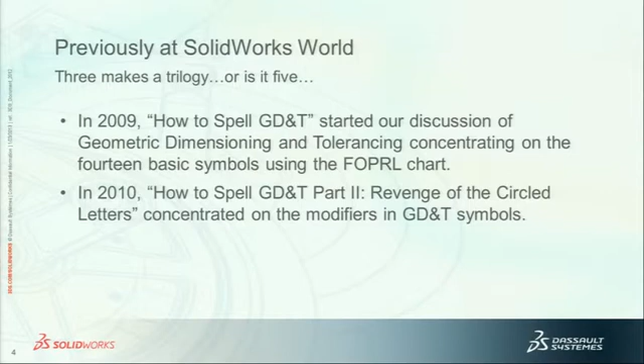There wasn't an obvious 3rd one to go after, so I went a little different tack this time. We're actually going to talk about tolerance zones and shapes. The big push today is what are we controlling when we put GD&T on drawings and stuff.

Leaving the theme of Star Wars, now we're in the Hitchhiker's Guide galaxy. As soon as you read the book, it says the reason why people buy the Hitchhiker's Guide is because it was a little cheaper than the Encyclopedia Galactica, and it had a big button on the front that says 'Don't panic.' But from my remembrance of the book, when you pushed it, nothing happened. So that's kind of what we're doing here. When you do GD&T, please don't panic, and regardless of what button you push, it's probably not going to help or hurt you.

42 in the books, that's the answer to life, the universe, and everything. When you look at GD&T, there are 14 symbols of GD&T. They're broken up into 5 families: form, orientation, profile, runout, and location. We grouped them that way, and that's from that first class I was telling you about many years ago, the FOPRL chart.

There are 14 symbols. They each have a name, a symbol, and a control they produce. 14 times 3 is 42. A coincidence that that's the answer to everything? I think not.

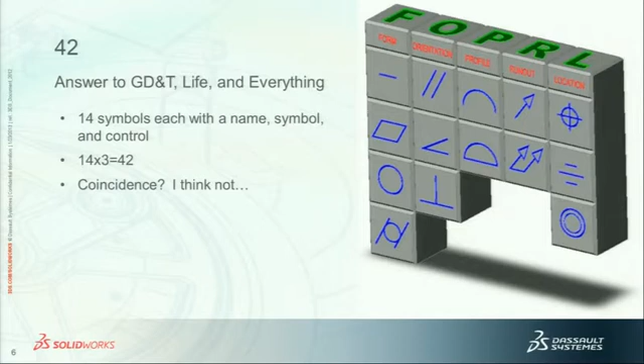Seriously, it's a better way of organizing the GD&T that I came up with to train people who didn't want to learn about GD&T. It makes you kind of feel good.

In 2009, they updated the GD&T standard, and when they did, they started revising how they group the symbols. They're not quite to FOPRL, but really close. They're starting to split up a little differently because it was extremely hard to read the standard and understand what they control and how it controls things.

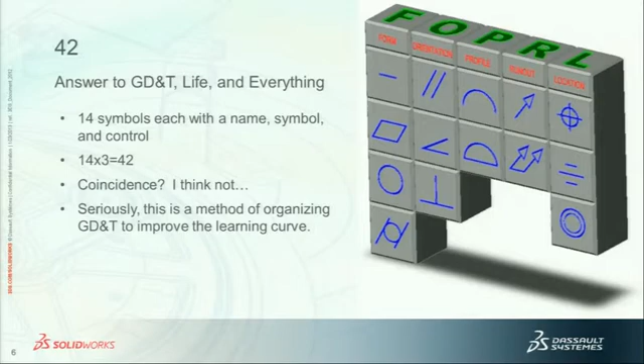Which brings us to the full-up FOPRL chart. This is what it looked like in 1994. We're using the standard, the green standard a lot of people have on their desk. Your drawings would have something that says, interpret this drawing according to ASME Y14.5M 1994. They reaffirmed that in 1999 and 2004.

It takes them a long time to actually change the standard, and you can tell—I think the date at the bottom right-hand corner says 1989, or sorry, 98, is when they actually came up with that chart. It's been a long time ago.

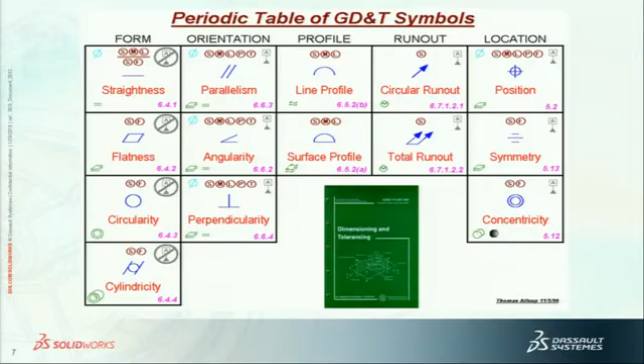But around 2009, they updated the standard for the first time in many, many years, and they switched from a green front cover of the book to now a white cover.

The FOPRL chart changed a tiny little bit, not its organization, but I actually brought it into SolidWorks and made a nice chart out of it. You can download this and look at it later.

It groups the symbols into 5 categories: form, orientation, profile, runout, and location. It groups them up and tells what kind of controls you can have, what kind of modifiers.

Now, if you're going to use this standard on your drawings, your drawings will say something like, interpret this drawing using ASME Y14.5, no M, dash 2009.

Not very many people have adopted this. Most people are still using the 94 standard. You could still buy, until last year, the 1982 standard from ASME.

You have to use whatever standard is called out on the face of the drawing. I have a collection of standards that go back to the 50s, just as ANSI and ASME was taking over who was doing the writing and interpretation of the standard.

If you switch to it on a lark and start putting this on your drawings, then from now on those drawings have to be interpreted using this book, not the old green book.

Most everybody in this room uses the old green book, right? You know what I'm talking about when I say the old green book? It's 1994. I see some heads and stuff.

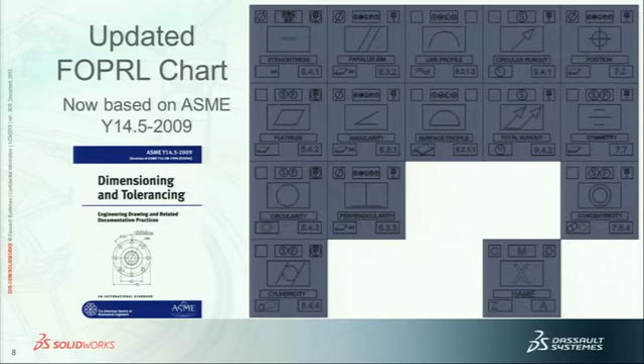The first lesson, after you get over the symbols—which you've already gone back and looked at that archive, and you already know how to put stuff onto drawings—the first lesson you get in geometric dimensioning and tolerances is the very first lesson.

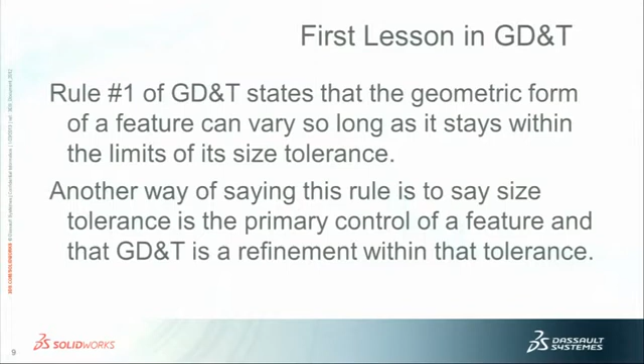The rule as it states in the standard is the geometric form of the feature can vary as long as it stays within the limits of size of the tolerance. That's a lot of big words for saying that the size you put on the drawings is the primary control for what parts you're going to allow to come in. When you add GD&T to those parts and dimensions, you are refining what you're going to accept. But the first thing that controls the part is always the dimensions you put on the drawing.

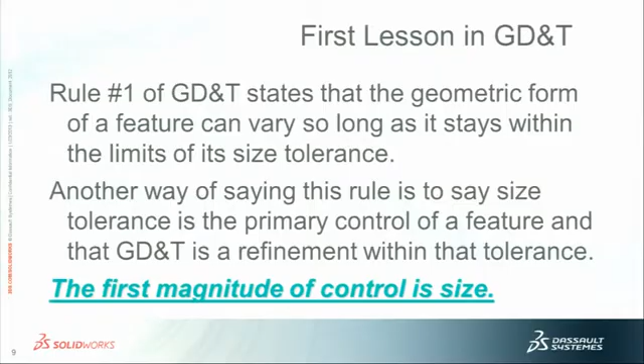A very shorthand way of saying it is, the first magnitude is size. That's the first thing you check.

It seems to bother people that GD&T is only something you slap on top of something after you already dimension it.

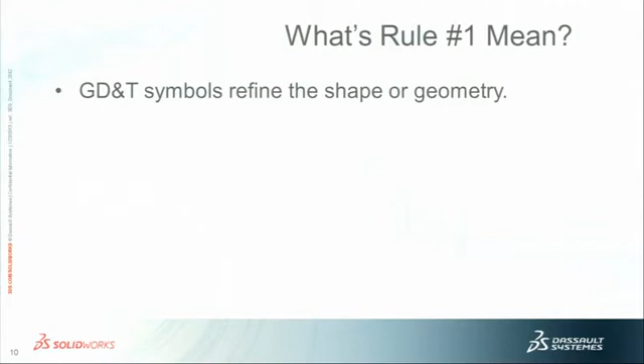Refinement, by refining a particular drawing or refining a feature, what you're basically trying to tell it is that you're going to check all the linear dimensions, all the angular dimensions first. You're going to check all of those size dimensions first before you ever check the GD&T. If your part's not 1 foot long and you ask for a 1 foot part long, does it matter if it's flat or not? You're going to reject it on the fact that it's not 1 foot and I ask for it to be 1 foot long. So GD&T is something you check later.

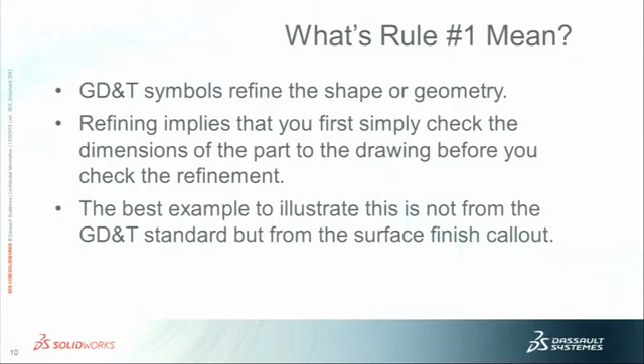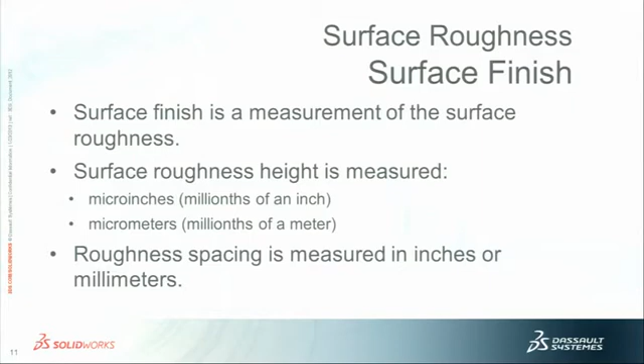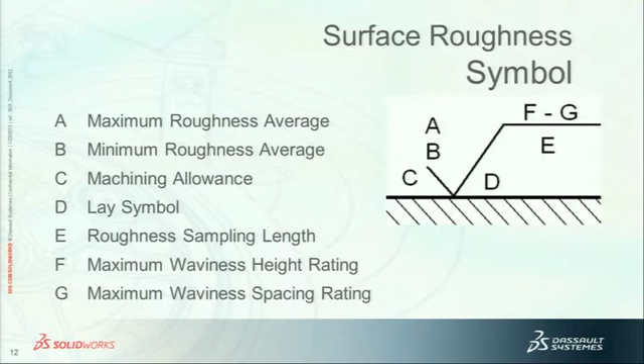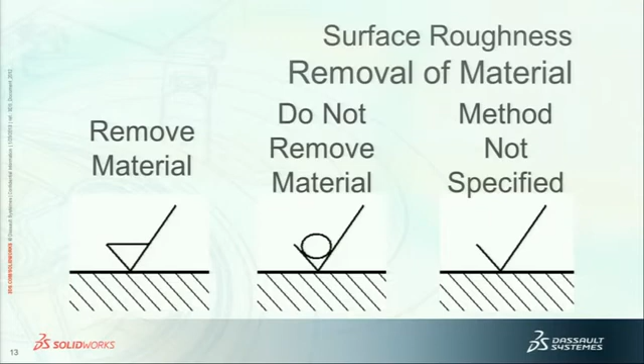The best example I can come up with is thinking about surface finish. Everybody here sees surface finish on a particular piece of material. It'll either be done in micro inches or micrometers. It's a measurement of how rough the surface is. We control that with a symbol. You can put these different numbers around the symbol, and as you put the numbers around it, you're telling them how wavy it can be, how high it can be, how rough it can be between the different edges. You're telling them, if you put different other symbols on there, whether you can remove the material, or if you don't want to remove the material. I don't care as long as it's got the particular surface finish I want. All of this stuff is refining that surface.

I like this slide because the very first surface finish symbol uses the perpendicular symbol, which is exactly the same perpendicular symbol we use in GD&T. The second one is parallelism, and it's not the same symbol we use in GD&T. In GD&T, we use two horizontal lines at 45 degrees to imply parallelism. Does anybody know why we don't use two lines going straight across for that icon? Because it looks like an equal sign, and that's terrible. You want an icon not to imply other things. So I'm not complaining about the surface finish guys, but they really should have used a better icon for parallelism.

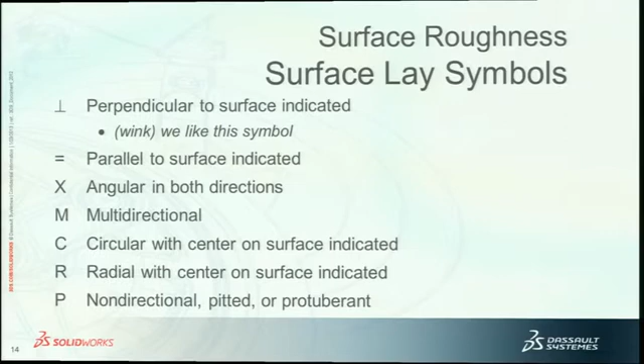When you look at that, you don't start inspecting a plate for surface finish by checking the surface finish. The first thing you do when bringing a plate in is check the length, width, thickness, everything on the drawing that defines what the part is. If any of those dimensions are out, you reject the part. You never waste time checking to see if it's smooth or not. That last inspection process of a part is checking the finish.

That surface roughness is a refinement on the limits of size. And that's exactly our definition of GD&T: you have the limits of size that control the part, and then you do something to refine what geometry you're going to accept. Here it's surface finish. In GD&T, it's geometric shapes.

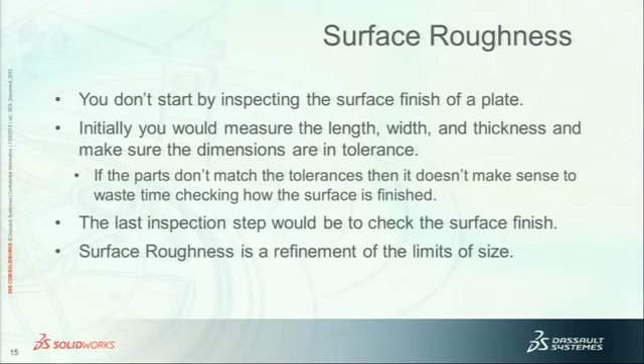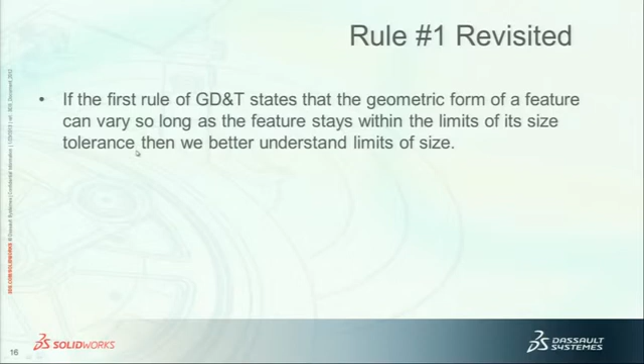If I go back and read that rule one more time, it says I can have a feature and it can move and change its shape and do everything as long as it falls within the limits of size of the size tolerance. Limits of size—I've said that word like 10 times now, and I really haven't defined it. Limits of size are the absolute minimum and absolute maximum value any particular dimension can have.

We are used to seeing dimensions that say 0.25 plus or minus 0.05. You actually have to do the math in your head and find out what the lowest acceptable number is and the highest acceptable number, and that's the limits of size. Those dimensions are allowed to be in that range, and it's acceptable.

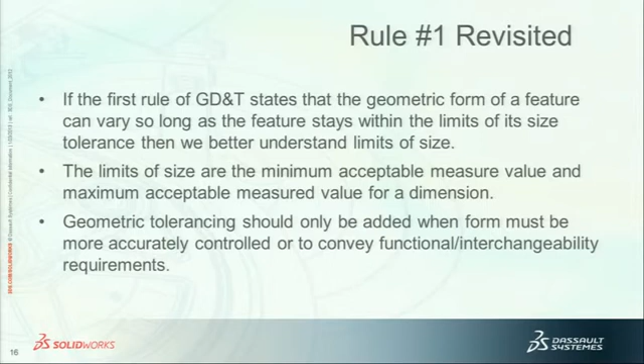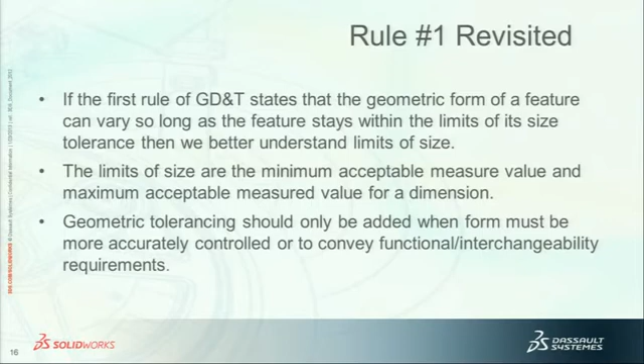When you look at GD&T, if I'm going to refine that size, what I'm controlling has to be smaller than those tolerances. If my tolerance is 0.05, then my GD&T has to control something better than 0.05, because I'm already getting that control from just my limits of size. That's a big mouthful for limits of size.

If I look at this particular part, here's one that's not dimensioned the way we'd probably like to see it, but it does what I want it to do. It has a lot of different features. We have a call out of a hole with a counterbore that has a particular depth. We have a radius. We have an angular. We have a reference dimension.

What is the limits of size for a reference dimension? There is no limits of size because it is a reference. You would never use that as an inspector. You're not expecting the machinist to use that dimension either, but you're only giving that to us for information purposes. But all the rest of them have tolerances to them of some sort.

So if I look at this particular call out here for a square hole that goes through the part, it has a square hole, 0.625. It's plus 50 minus nothing. Well, then the absolute smallest that would be acceptable is 0.625. The largest that would be is 0.675.

I'm not going to go through every one of these numbers, but you can kind of see we're trying to find out what the lowest one is and what the biggest one is. These are the limits of size for each one of these features.

Let me get to one of these. Here's a good one: the 0.75 radius max. What is the minimum radius allowable in there? Zero, max. It goes all the way up to 0.75. It can't be any more than that.

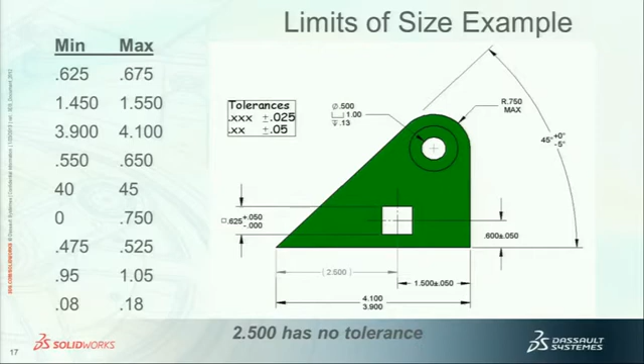The rest of these kind of all make sense. And of course, the 2.50 across the bottom has no tolerance. It's just a reference. So any feature that comes in and falls within those ranges of those numbers, that's the limits of size for this particular part, for each particular feature inside this part.

I have to take a little aside here and ask a question of the group. Is there a difference in the connotation of what it means to people if you see, on a drawing, 0.100-150, which everybody here agrees means that feature is 0.100 to 150 acceptable, versus 0.125 plus or minus 25? Is there any difference?

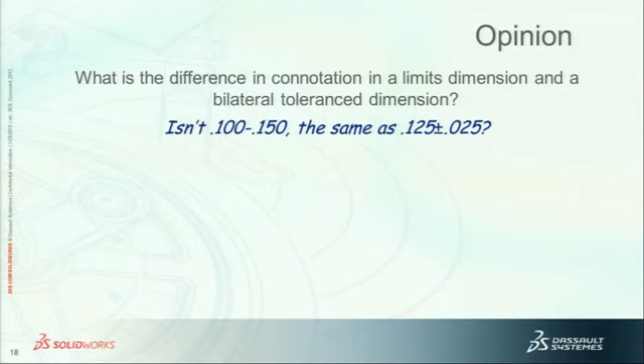I got yeses and nos, which is good. Answer number one is they're identical. They give the same limits of size. As far as GD&T standpoint, they're identical. They have the same range. But somebody said the word connoting. What's the connotation of it?

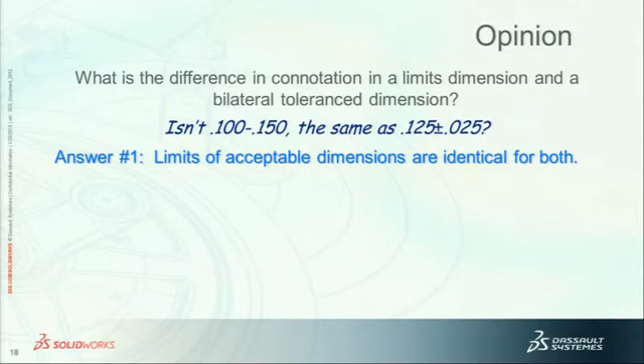Answer number two is, if I was a manufacturing guy doing this, what would I target? I would target 125 if I'm the right-hand side and let it go both ways because I want my maximum yield, if it's a standard kind of process.

But what if it's drilling a hole and all that's going to happen is my drill bit's going to wear out and my hole's going to get smaller and smaller? What would I target then? I would target the biggest hole. I would start drilling at 150 knowing that as my tool bit wears out, I'm going to get closer and closer to 100. So the first parts you get are at 150, and over the life of the program they get all the way down to 100. And then he's going to buy a new drill bit, because you're really cheap and you buy cheap equipment. So it's two different ranges of what you're trying to target for.

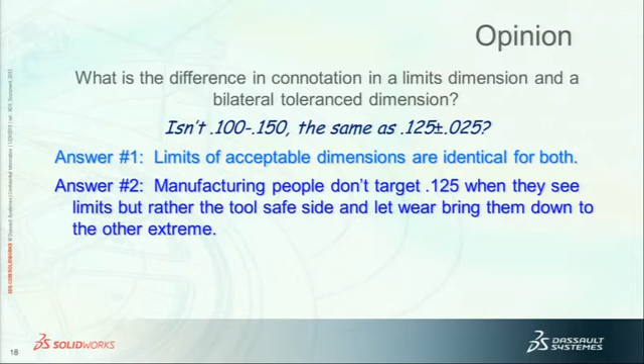Answer number three is, what would you put on the CAD model? If you see 150 to 100, did you model at 100 knowing it was getting bigger? Did you model at 150 knowing it was going to get smaller? Did you model at 125? So there's a connotation difference between who the modeler is and what you're trying to tell the person.

My answer to this from a GD&T standpoint is I want to see the one on the right-hand side. I want to see what your target is. My target was I was trying to get an eighth of an inch hole, so I gave him my target, 125, and oh by the way, I don't care if you miss it bigger or smaller. The one on the left, 100 to 150, I've given him no design intent whatsoever. All I've told him is what's acceptable. Although it's not a rule of GD&T, that's what we're trying to do with geometric dimensioning and tolerancing, is impart as much design information as we possibly can into the model, into the parts, into the drawing. So I would always put what's on the right, not what's on the left.

Are they both acceptable? Yes.

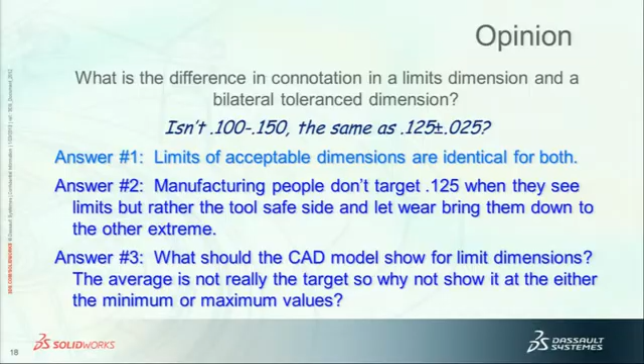Another little aside here. In the 1994 standard, there's one callout in there, and at the time it was a controversial paragraph to be added. The paragraph reads, if CAD/CAM database models are used and they do not include tolerances, then tolerances must be expressed outside the database to reflect design requirements. That means if you had 3D CAD models, you had to give somebody a drawing.

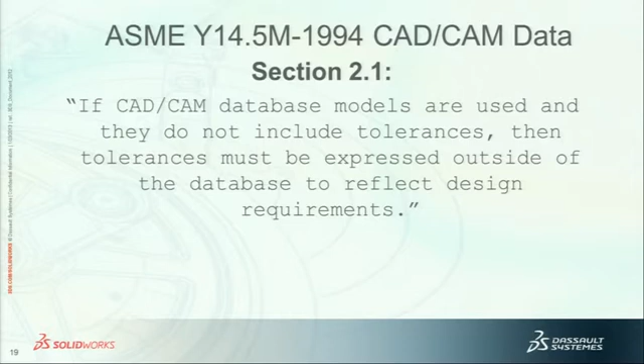What it was trying to say, it said with a negative, was oh, by the way, if you can put those tolerances inside your 3D CAD model, you don't have to make a drawing. And that's why it was controversial in '94 — you mean we can make parts without drawings, as long as everything's embedded inside the model? And like I said, it says it with a negative, and it's the only paragraph in a book this thick that mentions the fact that we might be doing stuff in the 3D world. Flash forward to 2009.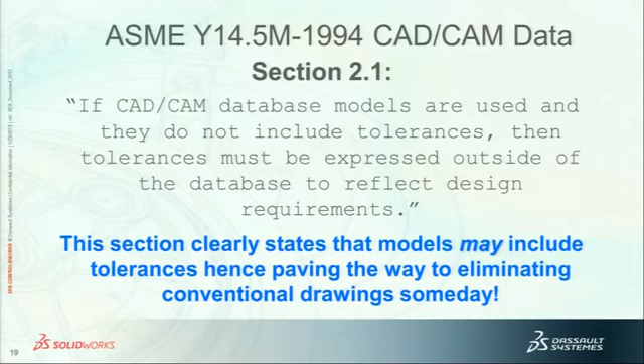2009 states, under its documents of what you can use, it cites the Y14.41-2003 standard that says here's how you do 3D product definition in the 3D world. It gives all the rules for what you do to embed dimensions and tolerances inside a 3D model, which means I can have a drawing or I don't need a drawing — all my data is inside my 3D model. It provides guidance for what you're supposed to do, and companies like SolidWorks and others follow that when they produce their files. If you use any of the standard formats — Parasolid, STEP 203, STEP 214 — they don't do it in IGES, but if you use any of the standard 3D models, they include the data per this standard.

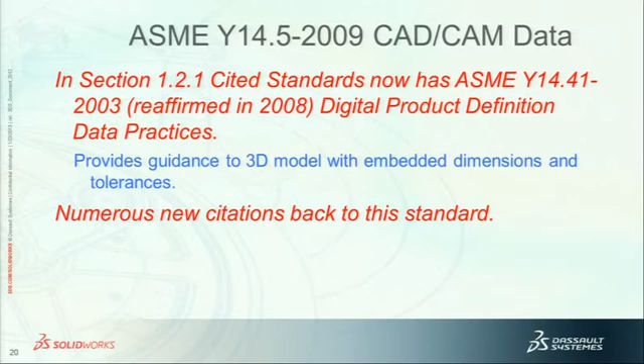There are numerous citations. This standard is about the same thickness, and now throughout the entire book they realized by the year 2009 that we're all using 3D computers, so they better mention here's how you do it if it's going to be embedded inside your 3D data.

It got mentioned by one of them. I was given this class before, and they said, oh no, it's real well documented in 1994 because of this. And I was like, in 1994 there was only a handful of 3D CAD systems, and that's when they wrote the standard. They kept reaffirming it, and like I said, that one paragraph was kind of even a controversial paragraph when they added it.

Let's get back to what we were talking about, limits of size and stuff. If you saw a part like this drawing, you'd see its overall length is 5 plus or minus half, its overall height is 3.5 plus or minus a half. If you look at that particular model, I've drawn some hidden lines inside and outside. That inside is the smallest the part could be. The outer one is the biggest the part can be.

They have very special names in the GD&T world for that. We call the one on the inside the least material condition. It's how does the part weigh the least? So it's the smallest that plate can be. I drew the lines on the outside for how do we make that part weigh the most? Well, if it's at the very biggest size, then it's the maximum material condition.

I like thinking of it as a weight, because if I drill a hole in there, what makes a drilled hole maximum material? Well, how do I make it weigh the most? I drill the smallest hole, so I'm trying to make it weigh the most. So maximum material for a hole, for negative features, makes them small. For positive features, it makes them big.

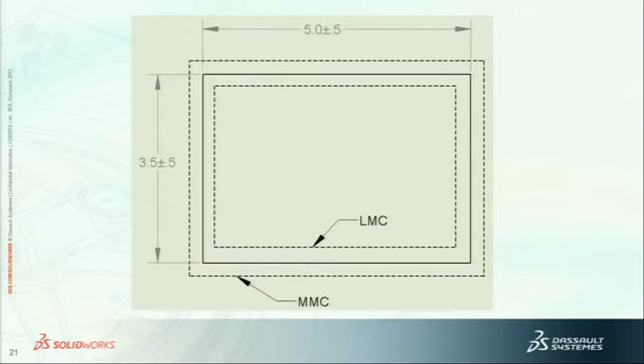It used to have a different name. In World War II, when the GD&T standard was just starting, 45 to 49, it had a different name - they didn't call it maximum material condition, they called it the worst case scenario. Sometime around the 60s, they decided that sounded too militaristic and too bad, worst case scenario, and they changed it to maximum material.

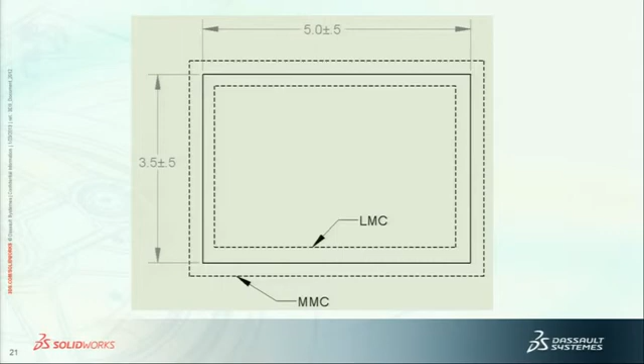So we do maximum material because we're just trying to make sure things fit together all the time. But that's the two limits of size, the smallest something can be and the biggest something can be.

Well, if I look at those two same things, the gray thing - this line here is my least material, and there's my maximum material, and the yellow was my target. You see the off blue purplish color part? That's the part I got from my machine shop. I have a really bad machine shop, and that's the part he sent me.

Do I accept that part? I have to accept it. He is completely within the limits of size all the way around. I have to accept that part. I do it cringing and realizing I'm never going to send you another part again, but I have to accept it because it matches my stuff.

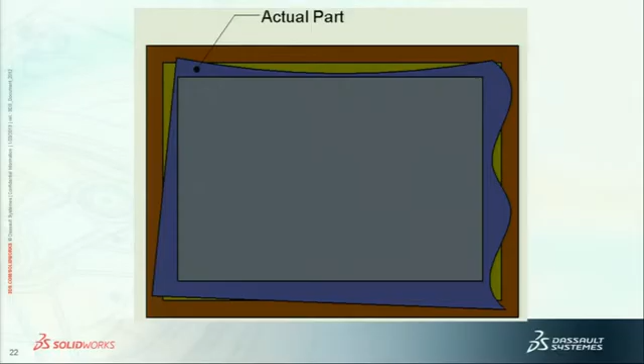But let's ask a question from GD&T. What if I needed one of those edges to be straight? What if it was kind of important that one of them be straight? Well, the first answer - how would I make it straight? I hadn't had a GD&T class in a while.

What's the first thing we would do? Tighten up the linear tolerances. Instead of it being plus or minus half an inch, I'm going to start making it plus or minus 2 mils, plus or minus 3 mils. If I start doing that, I'm definitely going to get straighter parts, right? The parts that will be acceptable now have a much smaller range of what's acceptable.

The problem with making a tolerance change from a half an inch, plus or minus, to plus or minus 2 mils, is that all of a sudden my part cost went up a lot. My yield went down a lot, and probably my time to manufacture too, because he's going to make 16 or 17 plates before he gets one that's good.

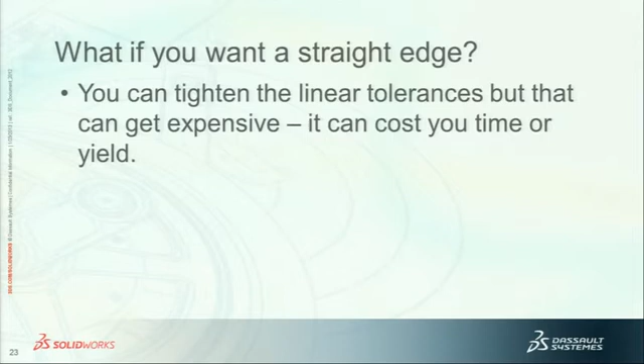So all I really wanted to do was a straight edge, refine one of my edges. As soon as I start saying that, how about if I just try to control the shape? We need some kind of shape control, something we can put on a drawing that changes what kind of shapes we're going to allow. Instead of calling it shape control, how about we call it geometric dimensioning and tolerance - geometric, because we're refining what geometry we allow for an acceptable part.

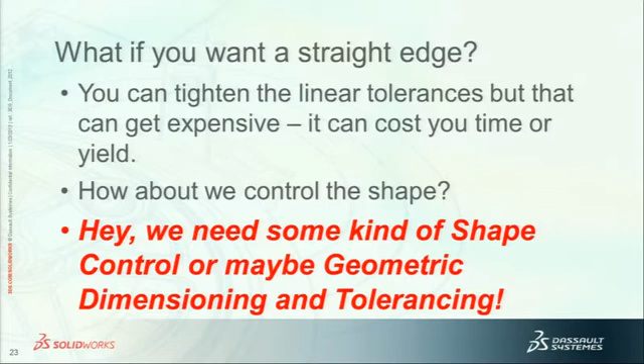Anybody remember the towel? The idea was if you were hitchhiking through the galaxy and you had a towel with you, you must have all your stuff together - you had enough to have everything together and you had your bath towel. If you didn't have your bath towel, you must not have anything together, and you're not worth being picked up. Well, we don't need a towel in lieu of having a towel, but we do need some GD&T learning on what kind of controls we can put on things and how we control them - and that's going to be our towel today, is that knowledge. It's a stretch, I'm sorry, I needed a joke there.

I already talked about the symbols a couple of years ago, you all can review that. We've already talked about modifiers a couple more years ago, you can kind of review that. What I want to talk about today is the tolerance zones and shapes - what does the GD&T control, what's acceptable, what's not acceptable when you see it on a drawing?

It sounds like the same thing - tolerance zones, tolerance shapes sounds like the same thing, and they are linked together, but they are two different things completely.

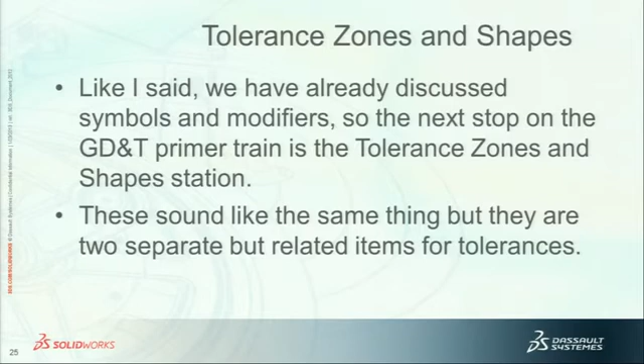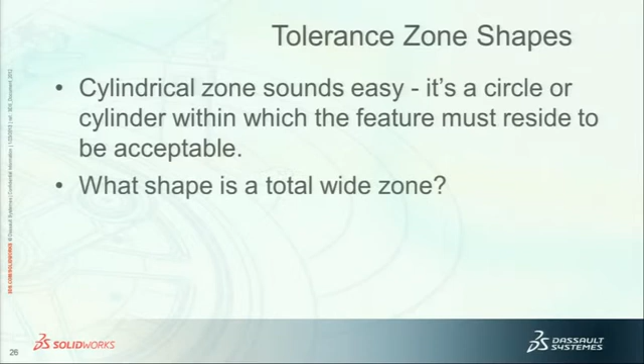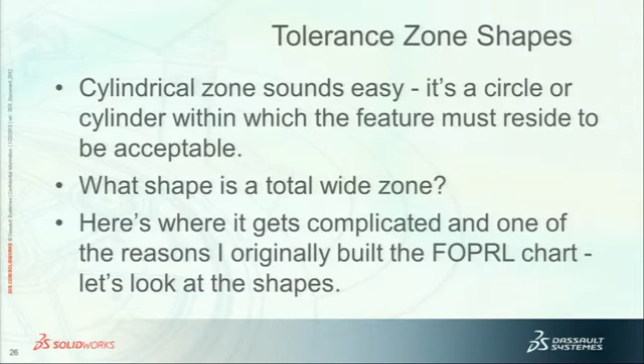We can have a cylindrical tolerance zone. When we have a cylindrical tolerance zone, it's just like it sounds - that's what I'm allowed to do, a little circle of what's acceptable and what's not acceptable. What shape is total wide? If I have cylindrical on one side, my other side is total wide. Total wide has a lot of different shapes, and that's where it starts getting complicated - what's acceptable, what kind of controls are you getting by using these other geometric controls that aren't controlled with a cylindrical tolerance zone.

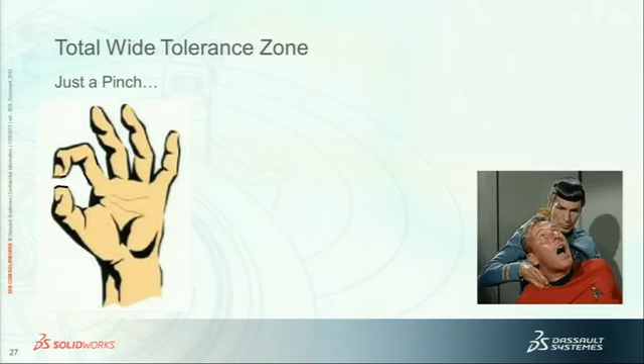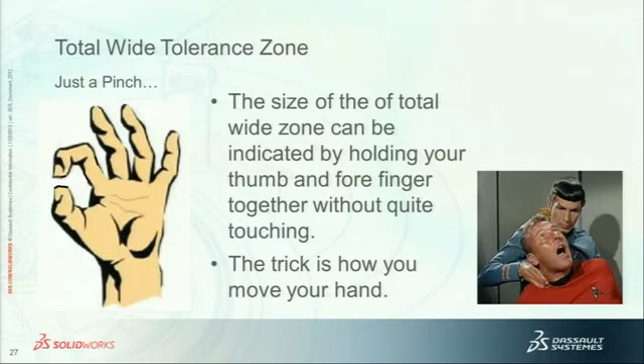We have just a pinch - not that kind of pinch, but that kind of pinch. The size of a total wide, whenever I'm teaching these kind of classes, and usually it's a lot smaller class than this, I'm always doing this with my hand. I put my finger in for it, and I'm doing like that - that's how wide total wide is. It's the distance between my thumb and my forefinger, that's how far total wide is. Now, it depends on how you move your hand - that's the trick with GD&T. That's how wide total wide is, it's that wide. But if I'm doing straightness, it's this. If it's cylindrical, it's this way. If it's profile, it's this. It's how I move my hand, it's not the distance between my finger and my thumb.

All controls, all 14 of the GD&T controls, have a total wide tolerance zone except for one - concentricity, whether two things have the same center, sounds like a cylindrical tolerance zone. That's the only one that doesn't have a total wide. The other 13 all have total wide tolerance zones.

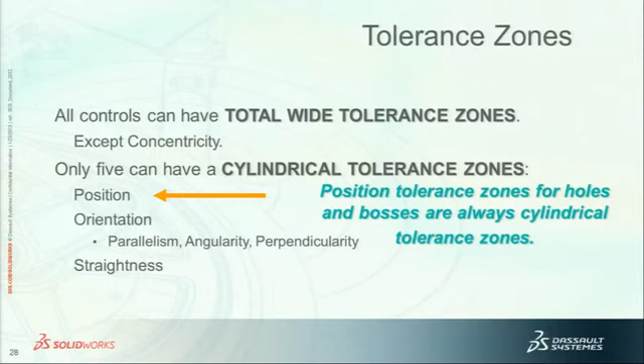There is a really weird exception I'll talk about at the end of this. I hate talking about GD&T where you say, well, here's the rule, and here's the exception, here's this, and except here.

So I try to keep all the exceptions at the end. The one I'll come back to is straightness of shafts, and why you can put a cylindrical tolerance on a straightness. It's a very weird reason why it can, in very unique positions, have a cylindrical tolerance zone. So there's five that can have cylindrical tolerance zones.

Concentricity must use a cylindrical tolerance zone. There's a lot of discussion in the groups about whether you actually have to put the symbol or not. I'll talk about that in a second.

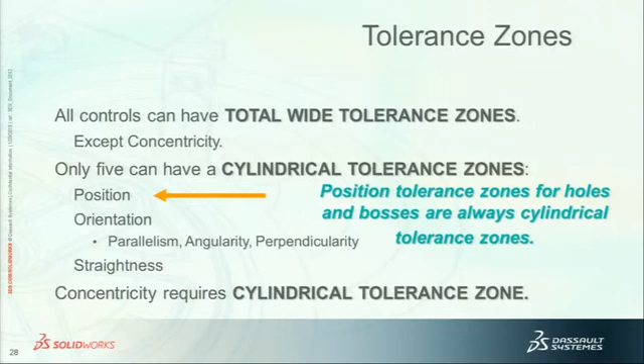So I'm looking for that symbol, or not looking for that symbol. What I said a second ago was, if you see concentricity, because concentricity is a cylindrical tolerance zone, there's some question about whether you really have to put the diameter symbol here or not. I always do. I want to see that diameter symbol there, I want to see that concentricity, I want to see that cylindrical tolerance zone there.

It might be redundant, I cannot find it in the standards. I've been to one or two of the GD&T conferences where they talk about it, and there's no good consensus. I imagine the next release will have that really defined, why you should put it there or not.

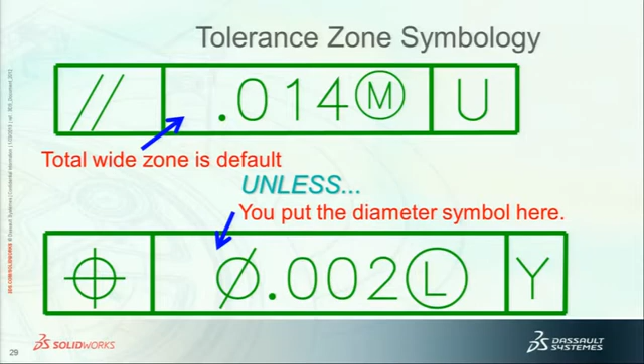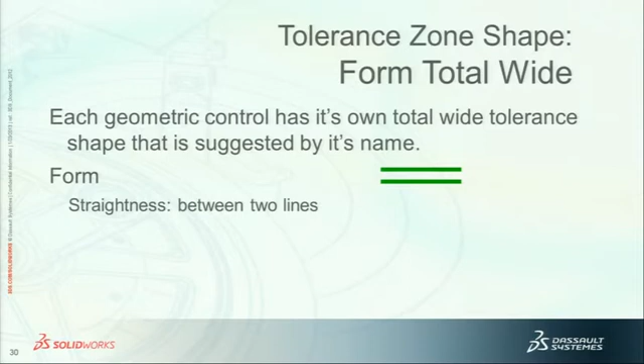Each of the 14 symbols, except one, concentricity has a symbol, they all have a total wide tolerance, and that kind of makes sense, it's part of the name, how we get to it.

If I'm trying to control form, remember FOPROL: form, orientation, profile, run out, location. The first control there is form. If I'm saying two things are straight, I use the straightness callout. I'm basically looking at two edges. My little fingers trace that edge, and what's acceptable is above it and below it.

Very important, if I don't tell you anything different, then it's the same amount outside and inside, it is uniformly distributed. During the exceptions course, I'll talk about how you don't always use it uniformly above and below. But right now, it's a little finger that traces my line, and that's what's acceptable and not acceptable, right along the line.

That's straightness. For flatness, I can still use my little hands like this and say it's all over the whole surface, but maybe you prefer to think of flatness as between two planes. As long as every point in that plane is between those two planes, the maximum and the minimum, as long as it's in there, that's an acceptable flatness.

For circularity, I've got two circles, the inside and outside. Again, I use my little fingers, I just trace a circle around it. One of them is inside my feature, one's outside my feature, and I just trace it right along there.

My last one is cylindricity, it's two different things going down through space like that. I usually think of those like little force fields, and if the part comes inside or outside those, it's not acceptable. But as long as it's within that little sleeve of goodness, I'm going to accept the part. Does everybody see that that's total wide?

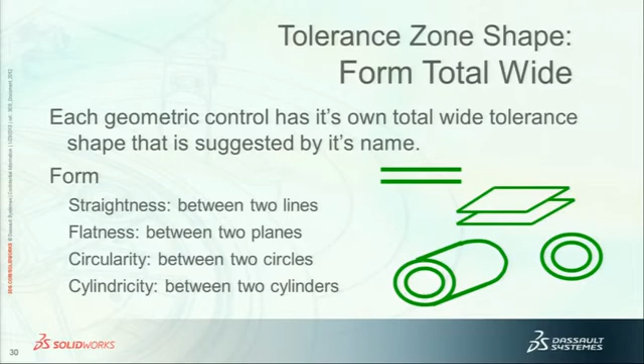That's form. Before I move to orientation, here are some different drawings that have form controls. If you take my class, we talk about two-dimensional and three-dimensional. The form controls are straightness and flatness - 2D and 3D - and then we have round: circularity and cylindricity - 2D and 3D.

Looking at this particular shaft, two-dimensional: I've got a half-inch shaft, and I'm saying it has to be straight within 0.003. That axis formed down through the center of that part has to be within 0.003.

If I go to the right-hand side, I'm looking for flatness. I've got a part that's 1.650 plus or minus 5 mils, and I have a flatness of 0.002.

Someone in this room is thinking, that's a kind of small tolerance anyway - why didn't he just change this tolerance to 1.650 plus or minus 0.002? Does everybody agree you get the same result? I'm now controlling something within plus or minus 2.

It's true, but does everybody agree it's a more expensive part to say plus or minus 2 versus plus or minus 5? I'm letting them have a bigger range for thickness, but I'm telling them that top needs to be flat. I like it from a design standpoint because I've just told them that top of the part is important to me, by putting the flatness on there.

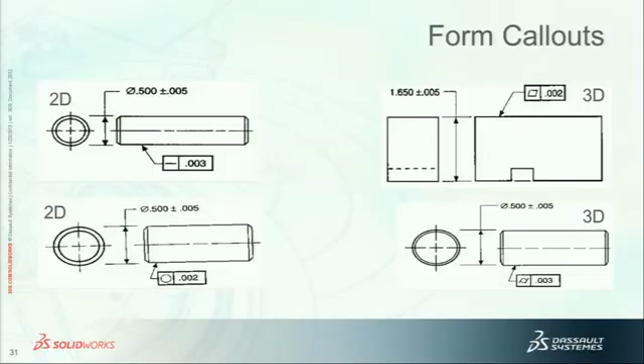So that's the different controls for form. When we look at orientation, we had the orientation control. We said orientation could be changed to be a cylindrical tolerance zone, but it can have just a total wide tolerance shape for these particular ones.

So looking at here, I always thought this is kind of funny. When I control if two plates are parallel with each other, I get a freebie when I check that - I get a free analysis. I'm controlling the flatness. If I say that two planes have to be angular or perpendicular to each other, one of the other things I'm getting for free is those two surfaces have to be flat. I always thought that was kind of cool. It's a free control because it's the same control as flatness for that surface. It just happens to be like that. So it's a free control.

The thing is, we'll even show there's some ways I could get around that control by using tangent planes. I can get away from it, saying I don't want it to be flat, but I need it to be perpendicular - which sounds funny, but you can actually do that.

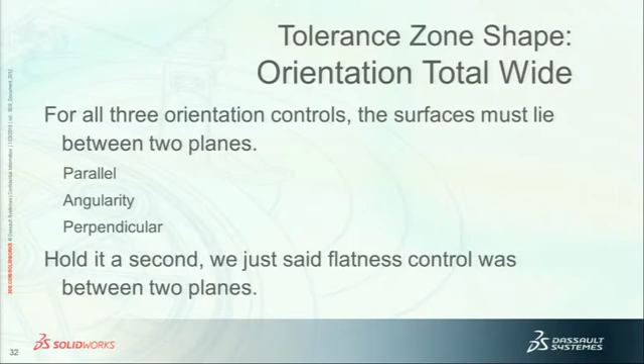That's the shape we're getting. If I look at the top left-hand corner, I've got a datum. That's the first time we had to use the word datums. But orientation - to orient something, I have to orientate it with respect to something else - so I have a datum call-out on the bottom. Here's my datum: my top surface has to be parallel with my bottom surface within 0.5. So I've got my little fingers apart, and they're 0.5 millimeters apart from each other, going back and forth this way.

But look at the overall tolerance on the whole part. It says I don't care if it's 100 plus or minus 1 - it can be thicker or thinner, from 99 to 101. I don't care how thick it is. But once you start machining it, I want it not to change more than 0.5 millimeters. I have refined what I'm going to accept, instead of changing that to 100 plus or minus 0.25, which would give me the same thing, but would be 4 times stricter of a size tolerance.

Bottom left-hand corner, I have to add 2 things. I add a datum across the bottom, but I also have to have a basic dimension because I'm going to check angularity. I'm saying that slope surface has to be angular within 0.4 of datum A - that 0.4 is, I put my fingers at 0.4 millimeters from each other and trace it back and forth this way. Everybody agrees that's completely different than if I just had 40 degrees from that surface with no basic, no box around it. If I had that, does everybody agree that's a pie wedge? The tolerance would be pie-wedge shaped.

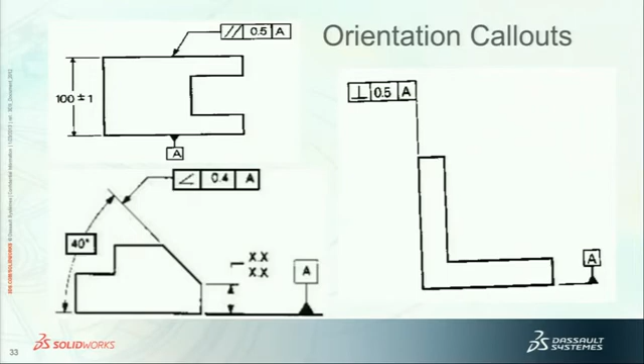That's what's acceptable. If I look on the right-hand side, I've got a perpendicular. I got my bottom surface set up as my datum A, and I said that left-hand edge has to be perpendicular with respect to datum A within 0.5 - so 0.25 inside, 0.25 outside. I got my fingers that far apart - that's what's acceptable to call that part. Form, orientation.

Next will be profile. We have 2 profiles: 2-dimensional profile and 3-dimensional profile. We have a profile of a line, and profile of a surface.

I'm trying to trace the profile. You've given me the theoretically perfect shape, and I've traced it around. That's what's acceptable, as long as it's inside that profile. Profile of a surface, now I'm doing it like this, and now I'm moving in 3D - that's acceptable.

Kind of a force field out there in space. As long as it's above or below, it's acceptable. And if it breaks that force field anywhere along the way, it's not an acceptable part.

Runout's one of those weird ones. It only has total wide, but it's a little needle moving back and forth. There's only one piece of equipment on the face of the planet up until a few years ago that could measure runout, and it was a dial indicator. Until the last 10, 15 years, that's the only way you could do it. You had to put a dial indicator on it, watch the little needle move back and forth. You could tell if something had run out.

Nowadays, with some of the laser inspectors and coordinate measurement machines, they can actually map that from 2D to 3D, and you don't actually have to do it. They turn the laser, it turns 360 degrees. Runout always requires that you rotate the part around one rotation - it's the only way you can measure runout. But you're watching that needle move back and forth. Within the last 10, 15 years or so, they can actually do that now without moving the part - they're moving the measurement tool instead. It's kind of cool. So when you look at that and watch the needle move back and forth, that's the total wide - how much is that needle moving.

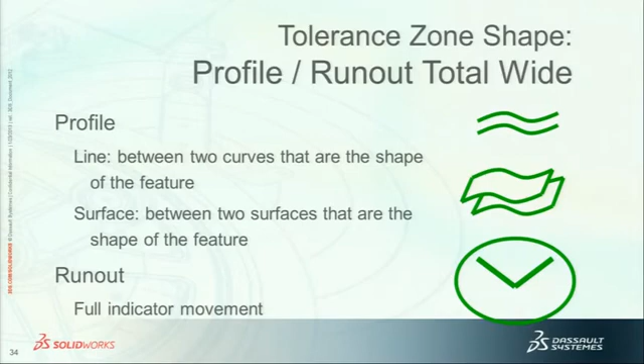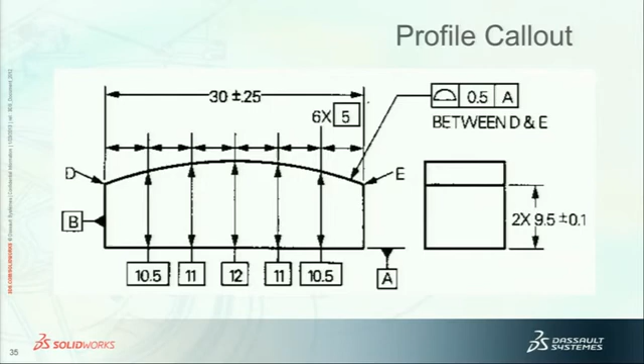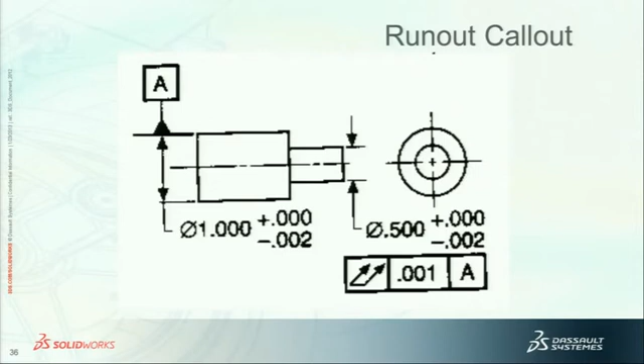No, it grabs the outside of it. Because it's in line—I apologize, it is the datum. Because this datum is in line with this, it means it's the datum axis down the center. It gives you one theoretical axis. Because this datum A is in line with this dimension, it's actually the center of that dimension. If they move that over a little to the left or a little to the right, it means that outer diameter—you chuck up on the outer diameter, and that's what you turn in your mandrel. So by being in line, it means I'm driving it to the axis, down to the center, versus I'm just grabbing that particular edge.

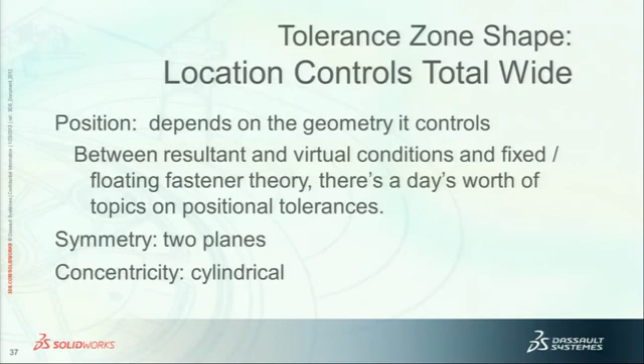But it's extremely hard to measure. Position is a little easier to measure. I could have easily thrown a drawing up here that just had drilled holes in it with the position thing, and everybody's seen that.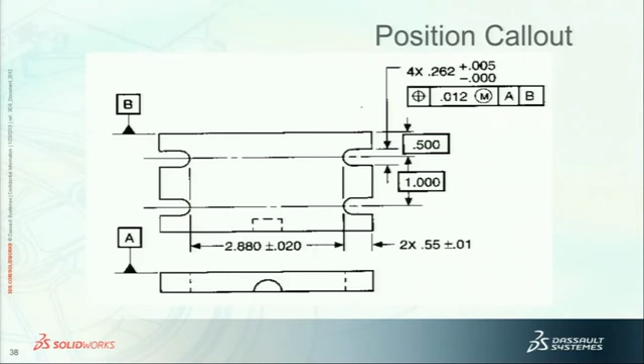That's an unusual control. People think when they say the word position, they think they're drilling holes. They think that's the first thing they're doing - holes, bosses, screws, mounting things. But it can position anything.

Now we get to the exceptions. Rule 1, remember what rule 1 was: size is the first order of magnitude of control. Size is the first thing we're going to inspect for. GD&T is only a refinement. Everything says that if you don't measure it to the dimensions on the drawing, I reject the part.

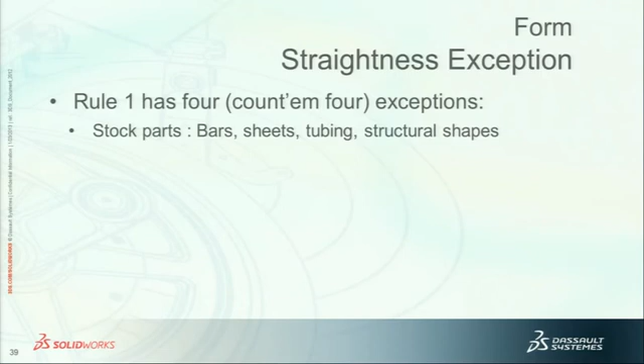Well, there's 4 exceptions on why you don't just measure the part. Number 1 was if you buy stock items. If you buy a 2x4, you don't actually put a measurement on there and measure it 2 inches by 4 inches. Everybody realizes you get cheated anyway, right? 2x4s. You buy gauge 12 wire, you don't put a pair of calipers on that.

It's one of the things that you don't measure it against a catalog. It's a thing between the lawyers or the purchasing office - did you really get what you bought? But you can't actually put a pair of calipers on there. There's nothing on a drawing you can put on there to measure 12 gauge wire. Anything that's formed with stock, anything that has those kind of stock items.

Parts that are subject to free state variation. If you buy an O-ring or a piece of flexible rubber, you can't put a pair of calipers on there because as you did it, you'd be imparting a force on it. Imparting a force on it means it's not free state. It means you can't measure it.

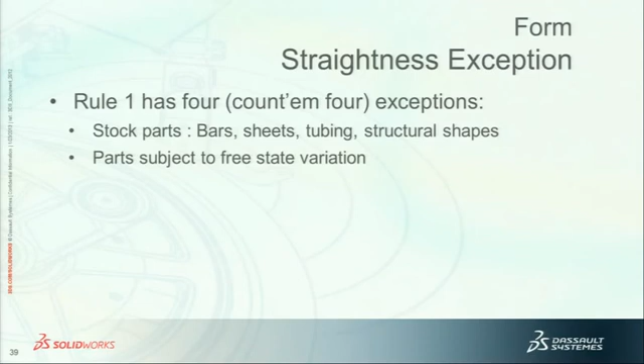So you don't check to see if something's flat because it's a piece of rubber, just because it's all coiled up on your part. If you actually put on a note that says perfect form at MMC not required, you can also stop and not check it.

Or if you put a straightness tolerance on a feature of size with maximum material condition - that's a lot of ifs and buts. But if I try to see if a shaft is straight at maximum material, the shaft is straight means the shaft is as big as it can be and it's straight. It can have a curve to it.

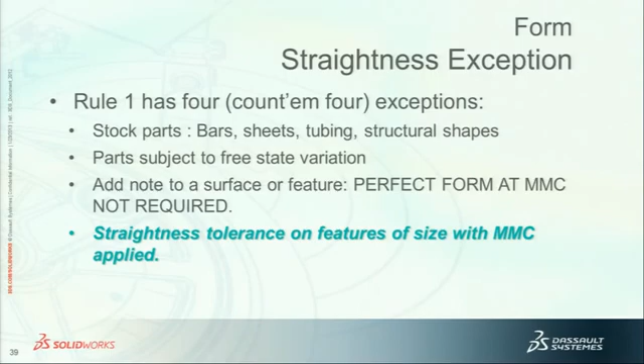That's the important one, and we see this one all the time. I'm trying to tell you that shaft is 0.500 plus or minus 2 mils, and its control is I want it to be straight within 0.015 at maximum material condition. Wait, 0.015 is much bigger than the plus 0.002. That's not a refinement of GD&T. I expected this number to be much smaller than this number, and it's much bigger.

It's because I've allowed it to not be straight. It means I'm going to make this shaft, it's going to be 22 feet long, and when I ship it to you, it's going to smile like a smiley face. If I grab it on the ends, it's a smiley face; if I grab it in the middle, it's a droopy frown. What I'm allowing it to do is how much I'm allowing it to change from one end to the other end - 15 thousandths of an inch. Does everybody make sense?

It's a really rare example, but you do see this every so often. You'll see this for straightness.

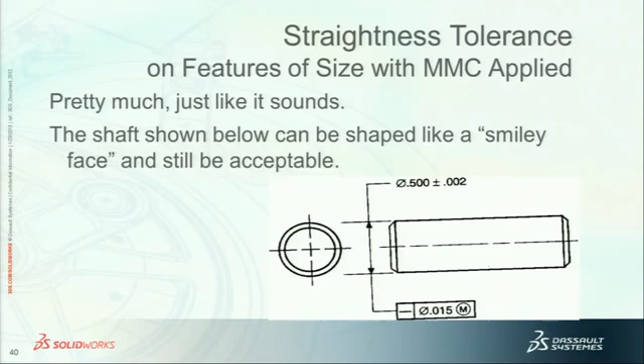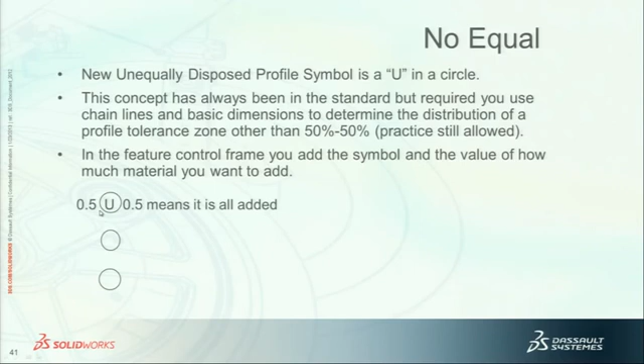There's 2 new symbols we have to worry about. I keep telling you over and over again that we have the same inside and outside of the tolerance stack up. The new symbol in 2009 is called an unequally disposed profile. If I do that, I have 0.5 with a U and a circle around it, 0.5. It means I have all my tolerance to the outside of my part.

0.5 U0 means I have nothing to the outside - I only allow you to remove material. Sound familiar? Like we're back to the old surface profile type stuff. And the last one was 0.5 U with some other number. If I have 0.1, it means I'm allowed 0.1 outside and the rest, 0.4, on the inside. So it's completely unequally distributed.

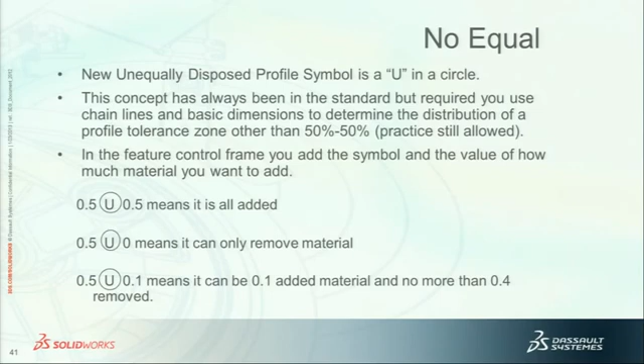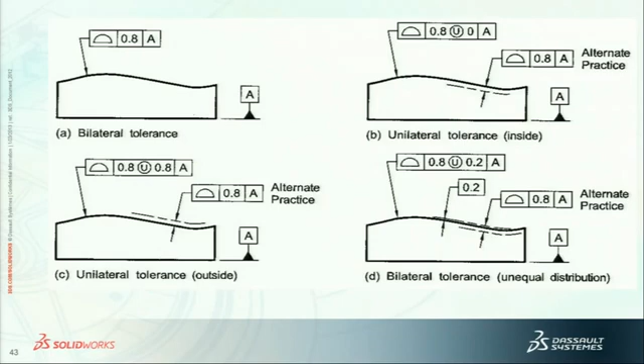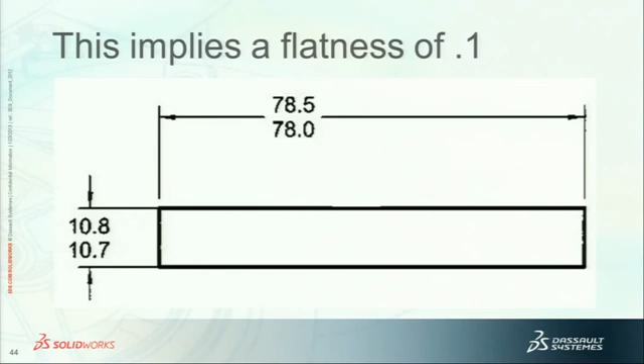There's a new symbol, it's called independency. I put an I with a circle around it. What it's trying to tell me is I don't need perfect form. I'm an old school guy - I would have used the Ghostbusters no symbol and put PF, no perfect form. What they did was try to tell me it's independent of each other.

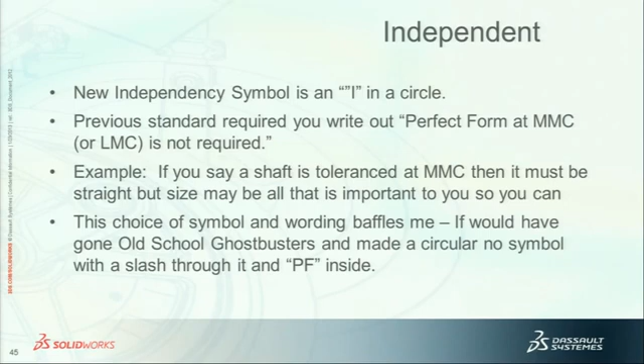But over the entire length, I'm going to let it do something - a smiley face, a waffle - but as long as the waffling doesn't happen more than 0.5. Does that kind of make sense? That's how I'm trying to tie those two together, because I'm getting a free flatness here that I didn't want. I don't want them to inspect it for flatness, so I'm trying to make them independent.